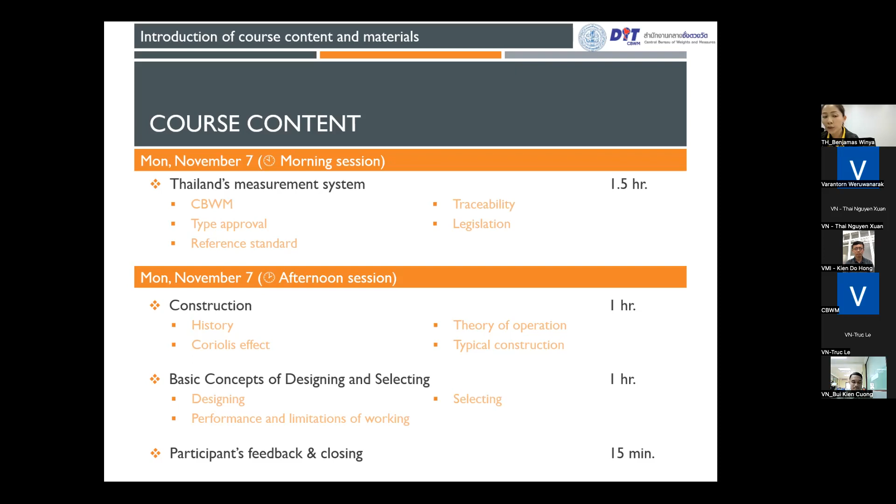Tomorrow, Tuesday November 8th, in the morning session, Marian will open the day with opening remarks for 15 minutes. Then the trainer will give you knowledge of installation, maintenance, and influence quantity. After that, Mr. Sutik, another trainer, will introduce calibration methods, covering dry calibration, wet calibration, and density calibration, before the lunch break.

In the afternoon session, he will guide you on how to verify the Coriolis Flowmeter, covering visual inspection, the verification process, sealing, verification marks, and documentation. Then we will wrap up everything learned over the 2 days together, open for questions, feedback, and comments, before closing the course completely by 3:30 p.m.

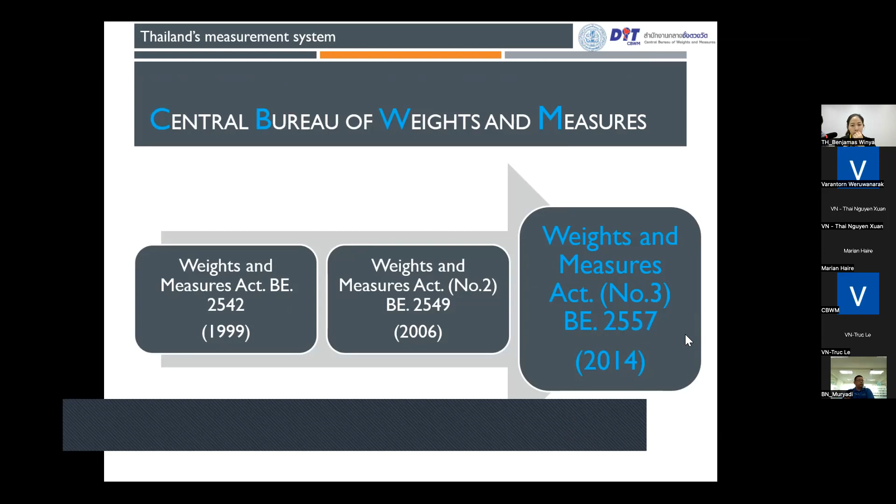CBWM is the one and only legal metrology organization in Thailand. The Legal Metrology Act of Thailand is called the Weights and Measures Act. The act was established in 1999 and revised to its current edition, the third edition, since 2014.

In this act, Central Bureau means Central Bureau of Weight and Measure, while Branch Bureau means Branch Bureau of the Central Bureau, which includes both regional centers and their branches. The Central Bureau of Weight and Measure, under the Department of Internal Trade within the Ministry of Commerce, has authority to keep and maintain reference standards of measurement, to issue business licenses and permits, to inspect and verify weighing and measuring instruments, to register the personal mark of business holders, and to perform any other acts as provided for.

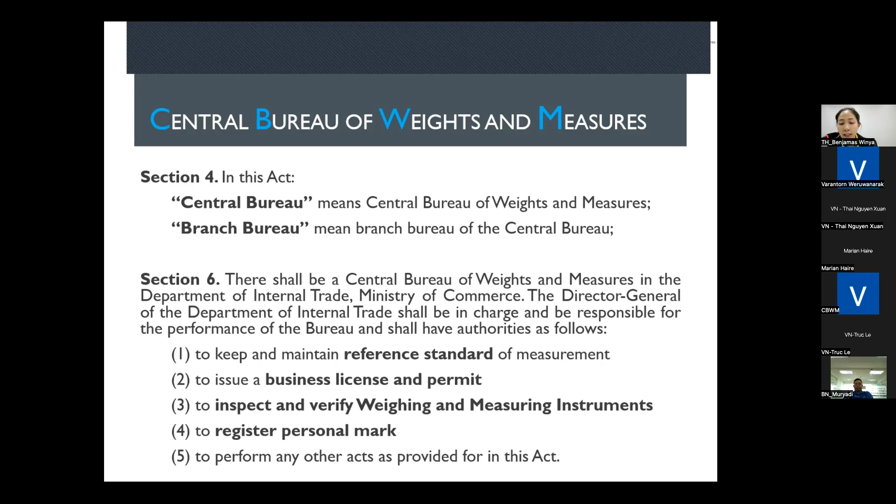As you can see from the slide, we are under the Department of Internal Trade, supervised by the Ministry of Commerce. There is also a Weight and Measure Committee to consult us. We supervise 4 regional weight and measure centers and 28 branches, covering 77 provinces for approximately 66 million people in Thailand.

In the central part of Thailand, CBWM is located in the central provinces. As you can see in the red rectangle, the Central Bureau supervises 7 branches covering 18 provinces, shown in the orange circle in the middle part of Thailand. This area is the central business area where most spring scale manufacturers are located, approximately 13 out of 15 manufacturers.

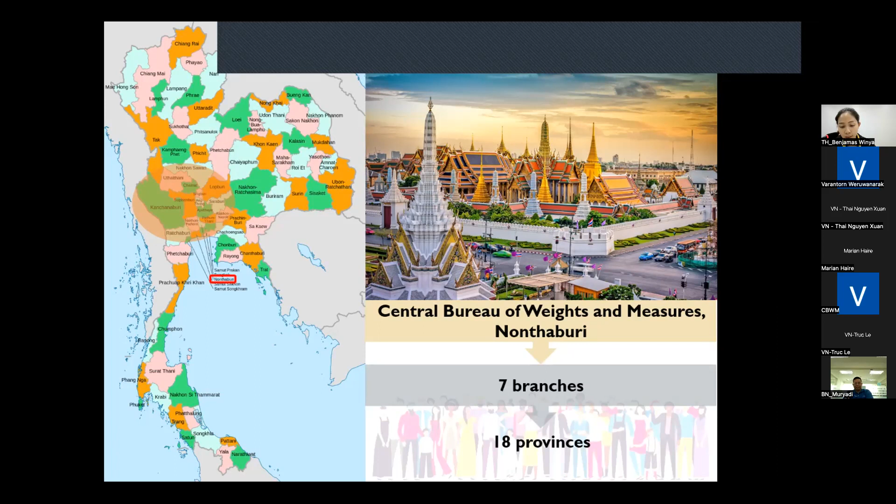The next part of Thailand is the northern part. There is the Northern Weight and Measure Center located in Chiang Mai province. The Northern Center supervises 7 branches covering 17 provinces, shown in the orange circle in the northern part. This area has many cold weather foods and vegetables for exportation.

Currently, the Northern Center and its branches are supervising the Longan grader in the northern area. The center is now setting up a laboratory for testing the refractometer and is currently studying to draft regulation for the refractometer and wood moisture meter.

The northeastern part of Thailand has the Northeastern Weight and Measure Center, located in Khon Kaen province. The center supervises 7 branches covering 20 provinces, as you can see in the orange circle.

This area has the most various types of rice and rubber trees in Thailand. Currently, the Northeastern Center is studying rice quality measuring instruments, apart from the rice moisture meter that is already regulated. They also have a percent starch measuring instrument for tapioca used in this area, and this type of instrument has registration as well.

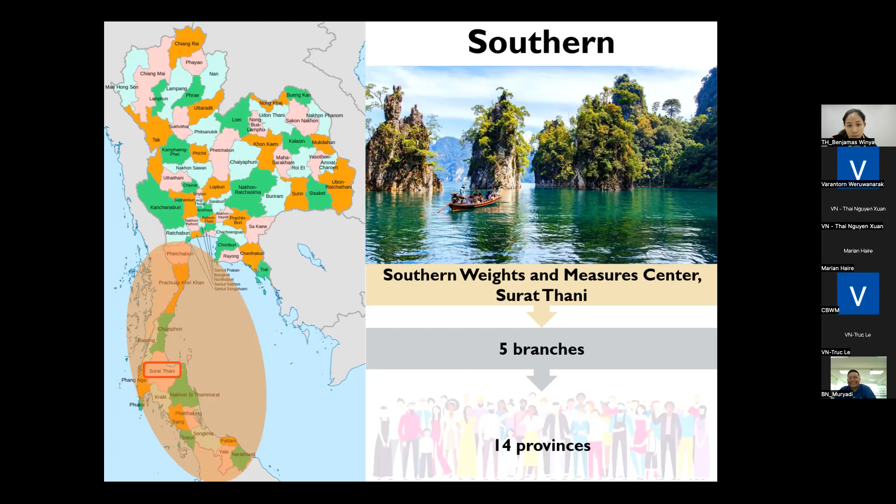But there are many oil refinery plants, oil depots, and important port areas located here, such that large flowmeters and weigh-in-motion scales are mostly found in this region. Coriolis mass flowmeters, fuel dispensers, LPG dispensers, and NGV dispensers are mostly found here, apart from the Bangkok metropolitan area.

The next session covers the Thai framework.

According to the Act, the scope of weighing and measuring instruments under this Act, or regulated instruments, includes all kinds of weighing instruments and all kinds of volume measuring instruments, except those notified to be exempt. Meanwhile, a measuring instrument which the Minister of Commerce notifies to be included is a regulated instrument under this Act.

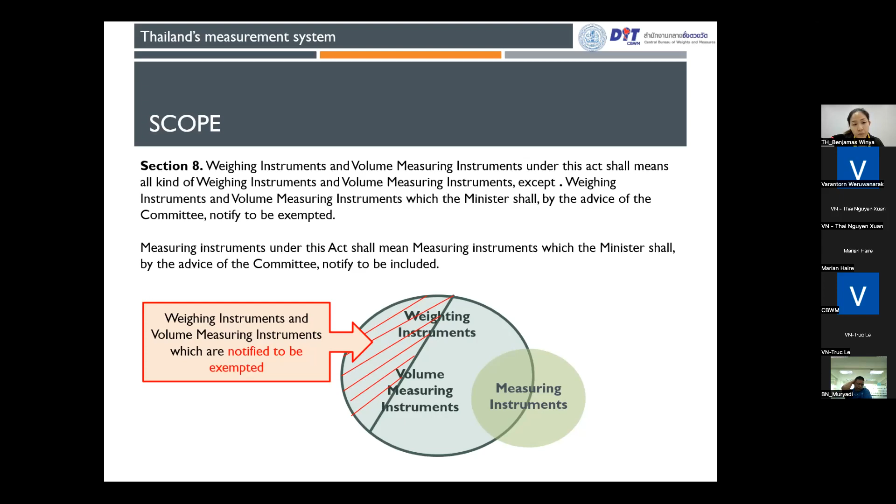So, not all regulated instruments are required to be verified. This section of the act specifies that only regulated instruments used in a sale or exchange of merchandise with another person, or in measurement services, or for the purpose of calculating remunerations, tax, and fees are required to be verified by Cbwm officers.

For the type approval system in Thailand, the act indicates that a manufacturer or importer who would like to manufacture or import weighing and measuring instruments used in a sale or exchange of merchandise with other persons, or in measurement service, or for the purpose of calculating remunerations, tax, and fees — which is the regulated instrument — shall submit the type of instrument along with supporting documents, or submit a type approval certificate to the Cbwm officer to be approved. As you can see from the picture, type approval is illustrated the same as verification, which means that the group of regulated instruments required to be verified shall be required to have type approval too.

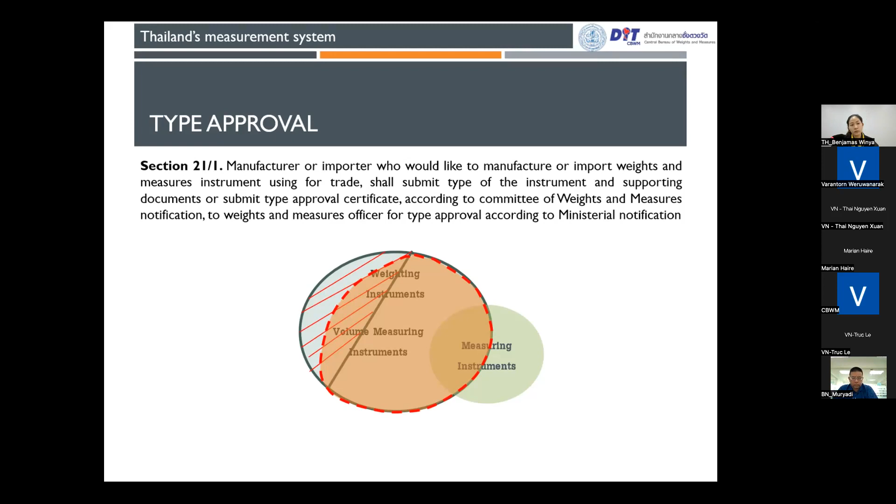The traceability chain — this slide shows the traceability chain of Thailand's measurement system. The regulated weighing and measuring instruments found in the market and used in a sale or exchange of merchandise with other persons, or in measurement service, or for the purpose of calculating remunerations, tax, and fees, are verified and inspected by the reference standard of Cbwm.

Here, this is the working standard that we use, traceable to the reference standard. For this reference standard, we keep three types of reference standards: the primary, the secondary, and the tertiary. This here is the reference standard from us.

And then we use the primary standard, which is traceable to the national primary standard kept by NIMT. Here and here from NIMT, this is traceable to the definition of the unit defined by BIPM at the top of the pyramid.

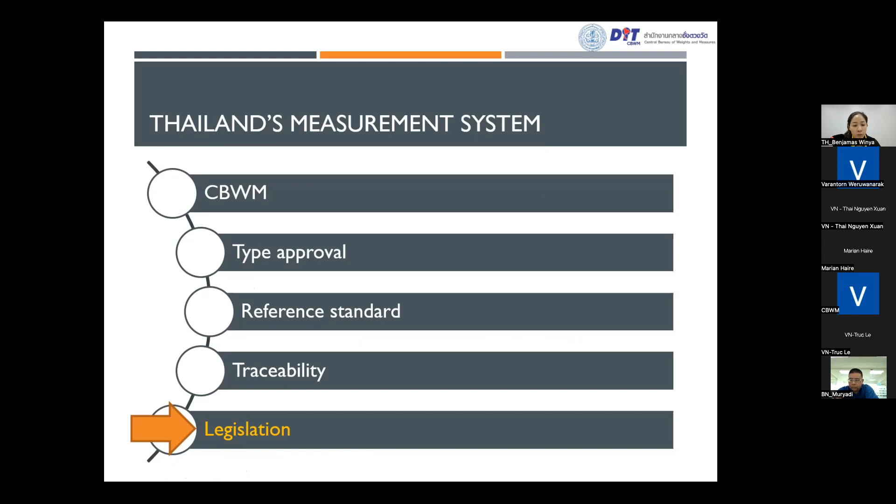Okay, so the next session is where I will brief you on the regulation of the Coriolis flowmeter. The regulation of the Coriolis flowmeter is specified in the notification of the Ministry of Commerce. This is the long name of the notification: notification of the Ministry of Commerce regarding prescription of type and characteristic of direct mass flow meters.

It also details the material used for manufacture, maximum permissible error, and the term of verification. So this notification contains not only the term of the direct mass flow meter, but also the requirement for the detail of material used to manufacture the flow meter. This notification will tell you the maximum permissible error of the flow meter and also the term of verification.

So in this notification, the direct mass flow meter is the meter designed to directly indicate the value of the mass of liquid or gas in a vapor state flowing through the meter, without depending on any associated devices or data indicating properties of the liquid or gas at the time of measurement from a source outside the system. Actually, there is one type of direct mass flow meter currently used in Thailand, namely the Coriolis mass flow meter.

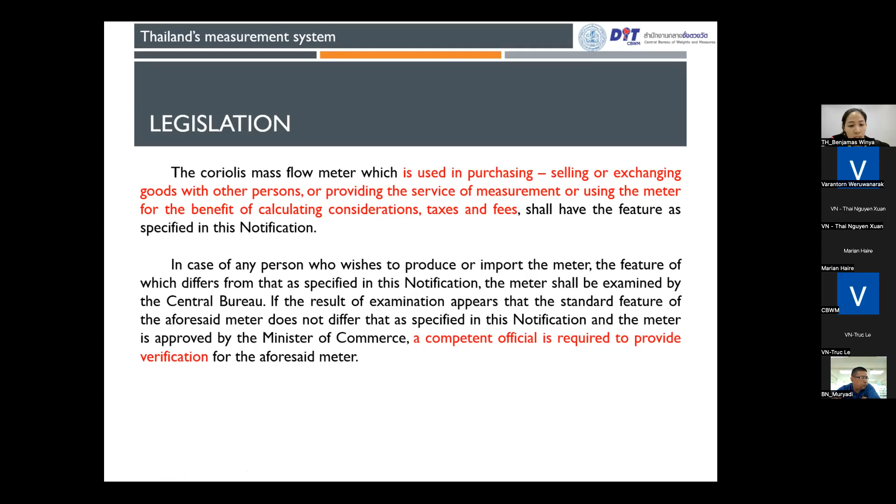The Coriolis mass flow meter shall be produced in a durable manner. In addition, it shall not be simply used as a tool of fraud.

The mass flow meter shall be produced from good material. It shall be designed and produced so that when used as usual, it can always operate accurately, and the components can operate continuously without defect, bend, or deformation which affect the accuracy of the meter. In case of adjusting the meter, the adjusted meter is required to maintain accuracy appropriately. In case of necessity, the Central Bureau of Weights and Measures may test the type of the meter in accordance with rules, procedures, and conditions stipulated by the minister on the recommendation of the committee.

But as I mentioned before, we have not passed the type approval system in Thailand yet. So maybe some types that we suspect to be used for fraud will be tested by us.

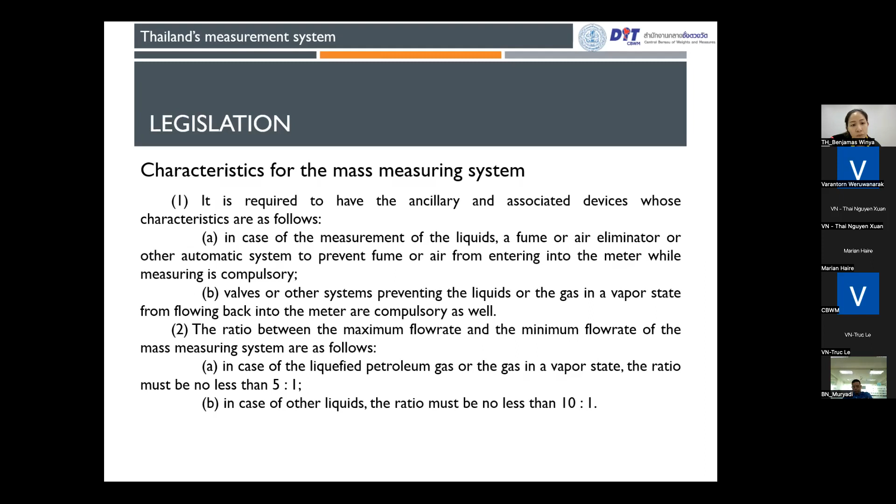The direct mass flow meter adjustment is required for adjusting the ratio between the displayed volume and the volume of the liquid or gas in a vapor state as actually measured by the measurement system of the meter. A shortcut piping system is prohibited to be used in adjustment, and there shall be a tamper evidence seal to prevent later adjustment.

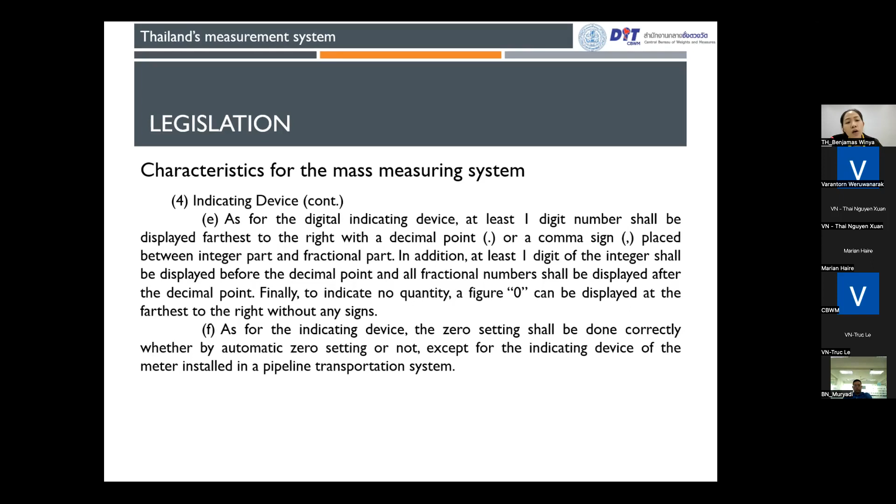The notification also requires detail for the indicating device, the zero setting device, and the price calculating device, as well as the quantity pre-setting device and price pre-setting device.

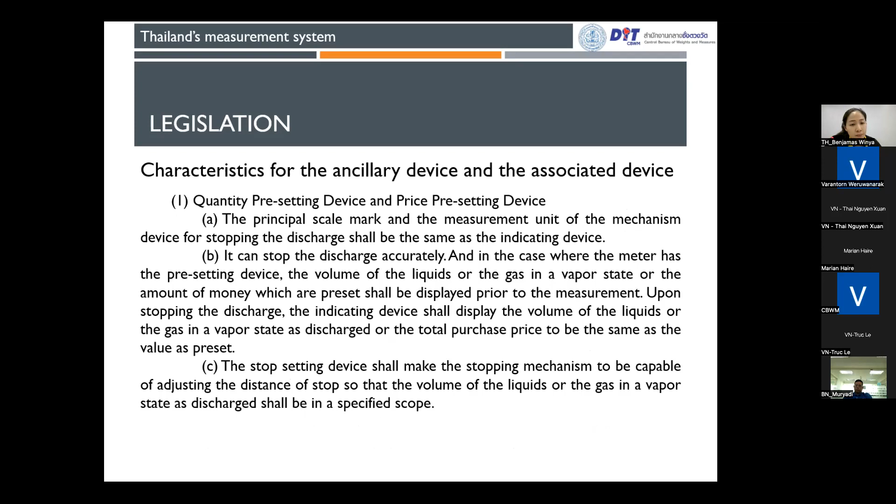Here we also have the characteristics of the printing device or the cash register. For example, the scale marks shall correspond with the indicating device. The printing of the measurement result shall correspond with the result shown on the indicating device, and the result shall be printed only after the measuring process is complete.

The printing of measurement results shall include details such as the total volume discharged, the unit price of the product, the total purchase price, the product type indicated by name, symbol, acronym, or code, and the date, month, and year of the sale.

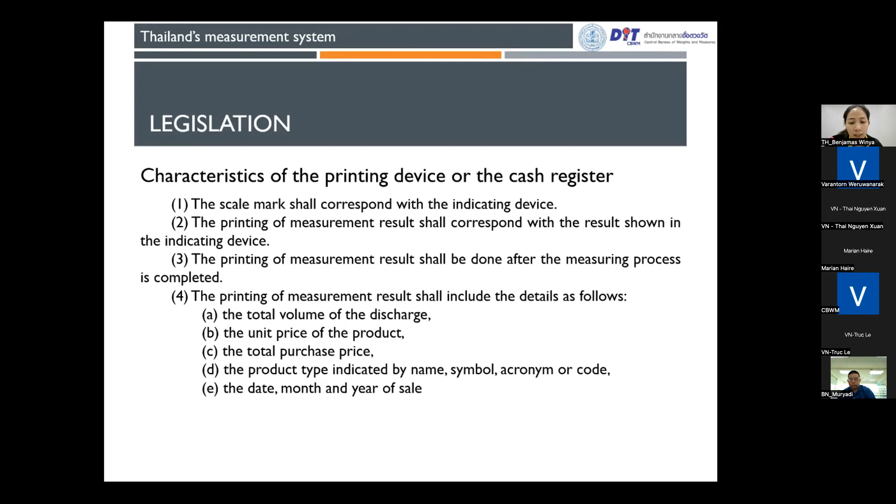For the MMQ, the minimum measured quantity shall be determined by the producer. As I mentioned before, this notification also indicates the maximum permissible error, or MPE.

For the MPE for initial and subsequent verification, we have 3 cases. The first case: if the test volume exceeds twice the MMQ, at the specified temperature, pressure, and flow rate, it shall provide both the positive and negative sides of the MPE of the weight as displayed at the measuring condition, or the volume of the liquid or gas in a vapor state as displayed at the base condition, conforming to the following table.

In the table, they classify the mass measuring instrument system into 2 types. The first type is the meter installed in a mass measuring system, which we call A. For A, if used for liquid excluding LPG, the MPE should be 0.5%; for LPG it should be 1%; and for gas in a vapor state, it should be 1.5%.

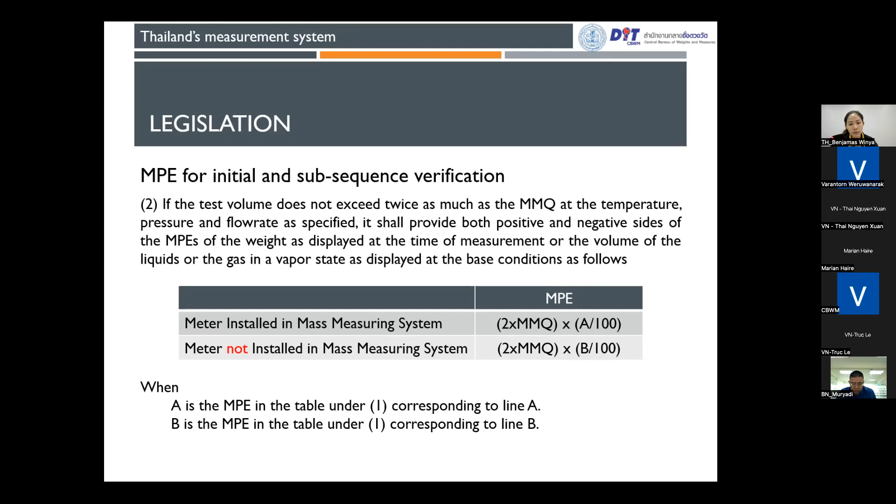The third one is errors in repetition - the error in repetition of the mass measurement results of the liquid or gas in a vapor state. If the test volume is no less than 5 times the MMQ at the specified temperature, pressure, and flow rate, the difference between the highest and lowest value of the test volume, consistent as displayed at the measuring condition, or the volume of liquids or gas in vapor state as displayed at base condition, shall have the value of weight conforming to the following table.

For A, the meter installed in the measurement system: for liquid excluding LPG, the error in repeatability should be 0.3%, while for LPG it is 0.6%, and for gas in vapor state it is 1%. For the other category, meters not installed in the measuring system: for liquid excluding LPG, the error should be 0.2%, for LPG it should be 0.4%, and for gas in vapor state it should be 0.6%.

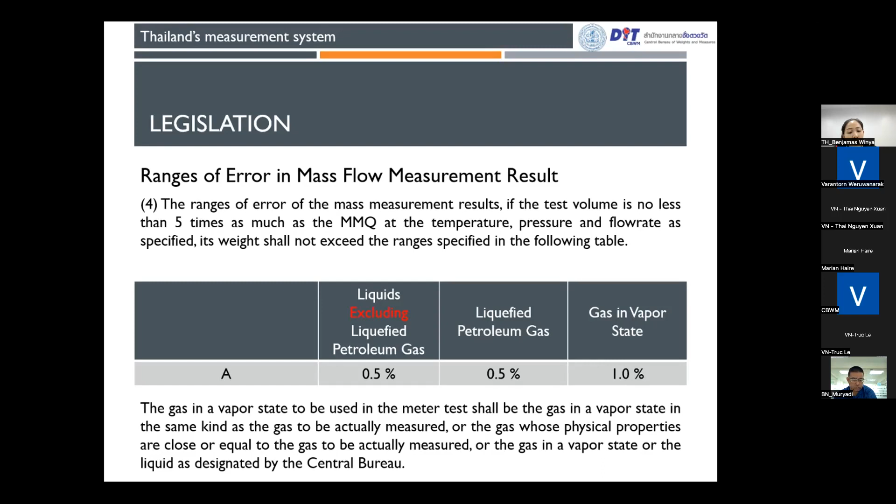The gas in vapor state to be used in the meter test shall be the gas in vapor state of the same kind as the gas to be actually measured, or a gas whose physical properties are close or equal to the gas to be actually measured, or the gas in vapor state or liquid as decided by the Central Bureau of Weights and Measures.

This table is the MPE for the inspection process. The MPE for the inspection of the meter which is installed in the measuring system when in service shall correspond to the designated range in the following table.

For the inspection, the MPE for the meter used for liquid excluding LPG should not exceed 1%, while for LPG should not exceed 2%, and for gas in vapor state should also not exceed 2%.

The notification also indicates additional characteristics for the mass measuring system in petrol stations providing LPG and gas in vapor state. You can see more detail in the notification.

The last one is the detail required to display on the flow meter, which has to be clear and indelible. First, year of production. Second, the minimum flow rate and maximum flow rate. Third, the maximum pressure at which the meter can operate. Fourth, the range of temperature at which the meter can operate. Fifth, the range of viscosity or the type of product used. Sixth, the minimum measured quantity. Seventh, the rated operating conditions. And the last one, in the case where there are other limitations, the display of such limitations shall be made.

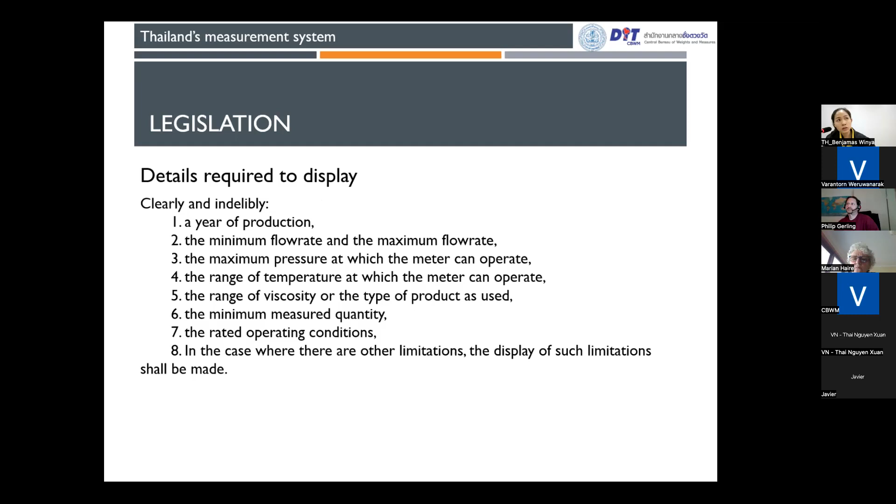Any questions? Hi, I have a question from Vietnam. Thank you for the nice presentation. I have one question about MMQ. How do you determine the MMQ value for valid verification? So, minimum measured quantity.

I think this is also a question I might answer, Benji, if you don't mind. Yes, go on, may I jump in? Sure. Well, the minimum measured quantity is a characteristic value of each and every single measuring system. It is a value from which quantity upwards a measuring system is expected to be correct within the MPEs, the maximum permissible errors.

Suppose a very big system - it is impossible to measure accurately with very big meters if you want to measure small quantities. So the smaller a meter is, the smaller the MMQ can be set, and if the meter becomes bigger, MMQ will become bigger. But it is a characteristic of each and every single measuring system. So generally speaking, it is not allowed to measure quantities below MMQ, because below MMQ the percentage error might become too high.

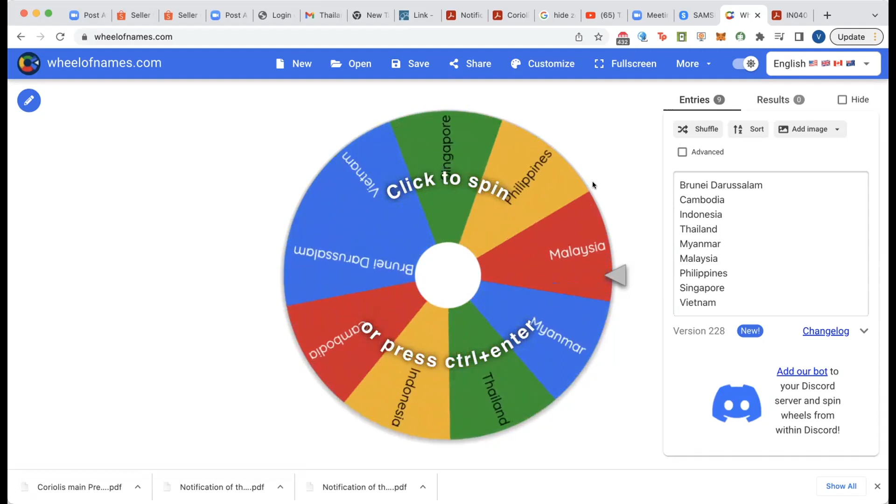If I click spin and the wheel stops at any of your economies, please share your experience regarding the flowmeter, any kind of flowmeter. You can say something about the Coriolis or other type of flowmeter. It depends on you. So I will spin the wheel, and if your economy was chosen, please send your representative from your economy to play the game with us. Thank you.

The first economy that was selected by the wheel is Brunei Darussalam. Please send your representative to share your experience about flowmeter with us. Thank you.

Mr. Nison. Mr. Nison, would you like to share some of your experience about the Coriolis flowmeter?

Hello, everybody. For Coriolis flowmeter, at the moment, we haven't done any. We have customers who have 3 Coriolis flowmeters in Brunei, but at the moment we haven't started doing anything. Usually in Brunei, we select a third-party vendor which is qualified to do it. The majority of our vendors come from Singapore and Malaysia, so they're doing it for us. We just accept their report and we transfer knowledge from the economy from Malaysia or Singapore, depending on the vendor. All right, thank you.

Today the main topics are as follows: one, history; two, Coriolis effect; three, theory of operation; and typical construction.

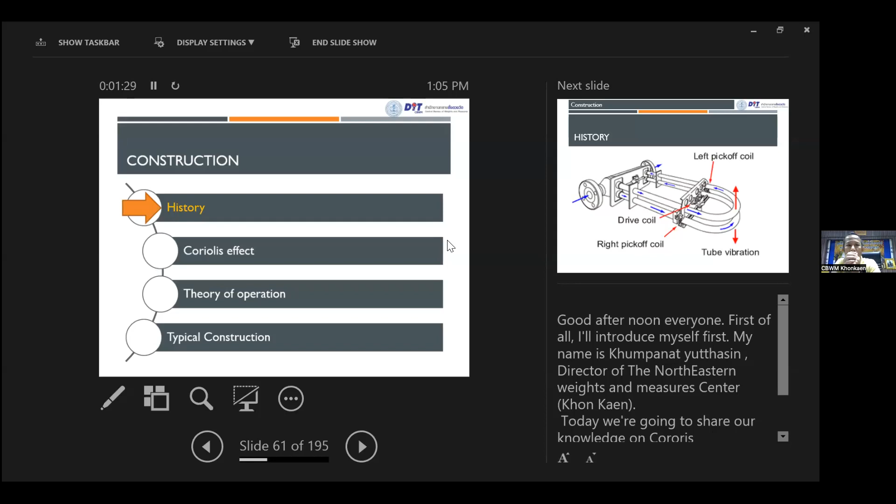Construction of a mass flowmeter consists of history, Coriolis effect, theory of operation, and typical construction.

Coriolis mass flowmeter is a flowmeter that measures mass instead of volume of liquid. This type of mass flowmeter has been developed to be used in a wide variety of industrial applications for more than 25 years.

The main characteristic of this flowmeter which made it widely used is that it does not depend on factors or properties of the liquid being measured. Meanwhile, other flowmeters are affected by density, velocity, viscosity, pressure, and/or temperature of the liquid being measured.

Mass flowmeter measures the mass of a liquid while the liquid is flowing through the meter sensor. With this unique characteristic, we can use this type of flowmeter to measure various types of liquid without calibration, adjusting compensation values, or adjusting corrective values due to changing factors or properties of the liquid being measured.

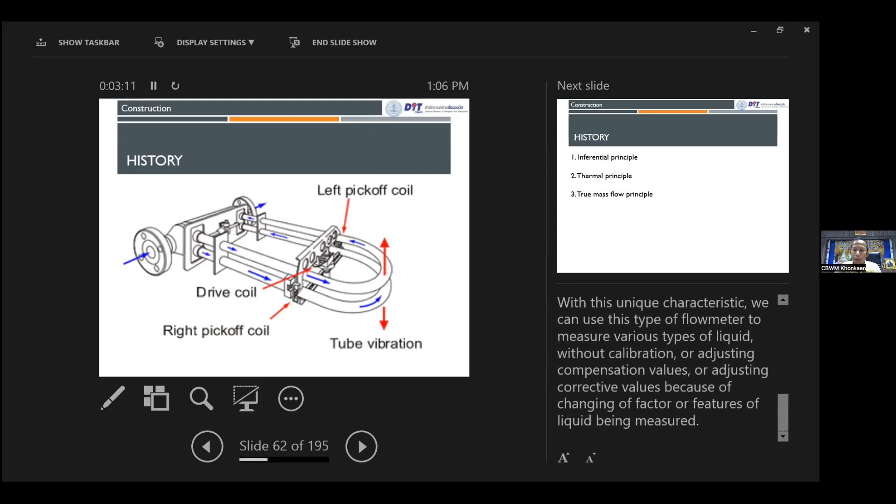Before getting to know more about mass flowmeters, we should understand the general fundamentals of the mass flowmeter.

There are three operational principles to measure mass flow rate as shown on the slide: one, inferential principle; two, thermal principle; and three, true mass flow principle.

First, mass flowmeter using the inferential principle. This type of flowmeter is used to measure flow rate by volume together with measuring density of liquid.

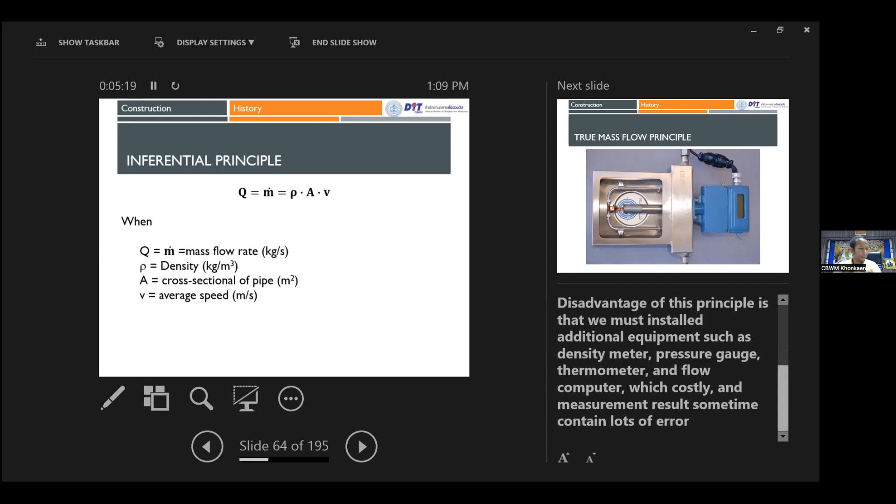Okay, in the thermal principle, we... sorry, we have a technical problem. Just wait a second.

Hello. Hello, everyone, can you hear me? Yes, we can hear you, but the host has some technical problems, just wait a second. Everyone can see the slide? We can't see the slides right now, so just wait, try to share the slide again. Okay.

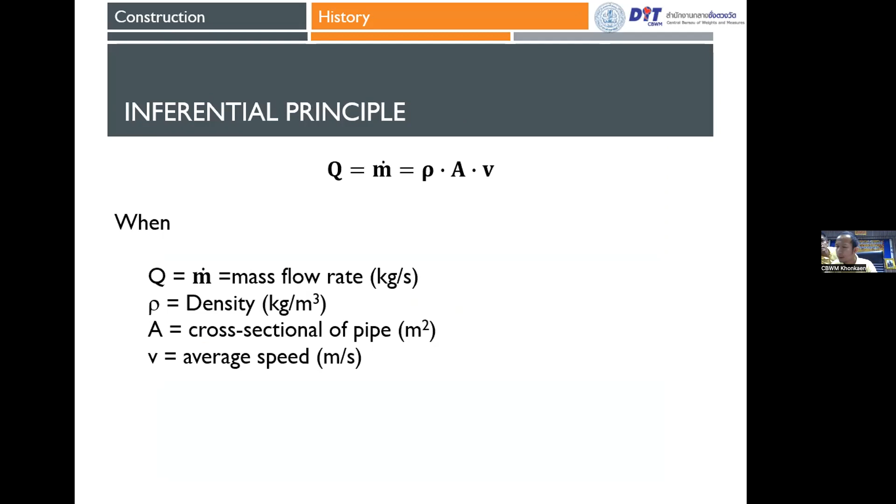Okay, true mass flow principle. Everyone can see the true mass flow meter principle? We can, yes, hear you, and we can see the slides, and we can hear you, so off you go, we're ready. True mass flow principle.

The flowmeter using true mass flow principle uses the principle of analyzing the result of rotation, movement, and radial motion of liquid. This movement of liquid creates Coriolis acceleration and Coriolis deceleration from the force of the liquid on the meter.

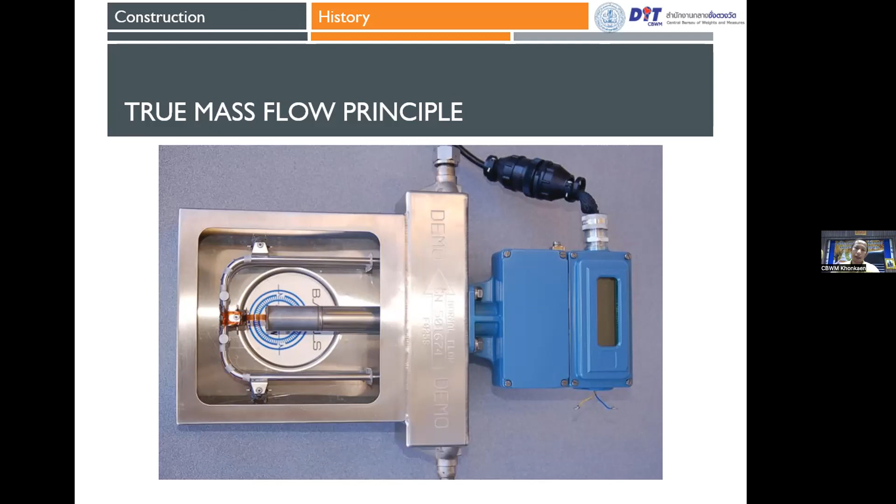Okay, next topic: Coriolis effect.

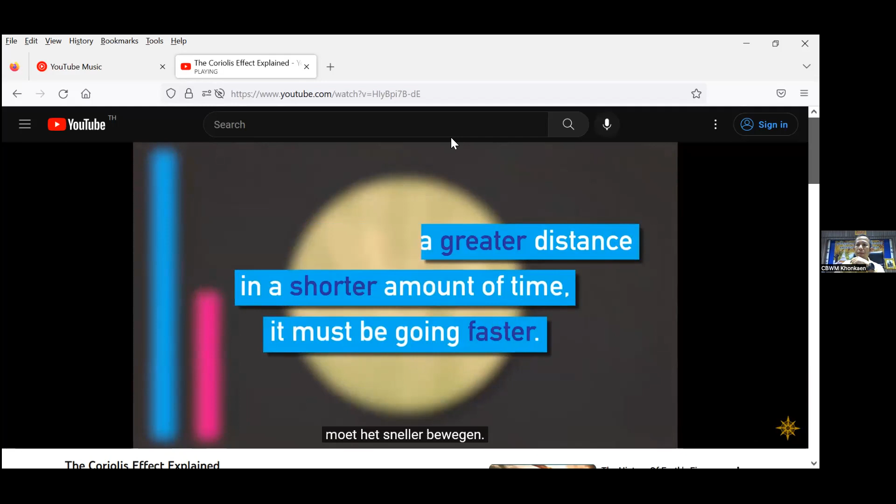Now swap out this flat circle for the Earth, and this remains true. All points closer to the center, like Greenland, will be spinning slower compared to points further away, like Brazil, closest to the equator. If we look at this over time, arrows at the equator travel faster than arrows at the 45-degree line, as we just observed.

Now imagine clouds form on the equator. They'll have the same velocity as the Earth there, but when the wind sweeps them north, the Earth isn't spinning as fast. Their speed remains the same, they don't get any faster, but everything around them is literally traveling slower. So relative to the ground, they move ahead of everything else.

If you're on the 45-degree line, you'll have the same speed as everything around you. But if you move down toward the equator, you'll be moving slower than the ground underneath you, so you'll fall behind. The same happens in the other hemisphere: moving toward the equator always results in falling behind, while moving away results in pushing ahead.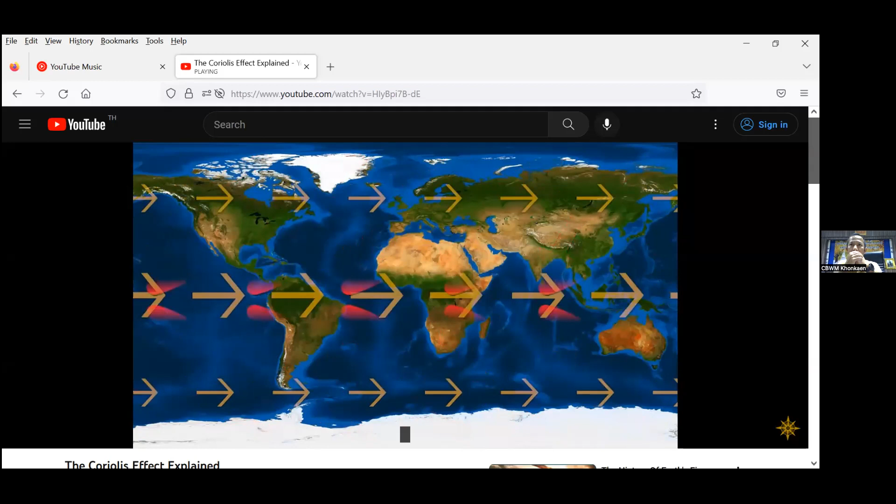Now let's show a low pressure cell. That means all the air around it will be sucked into the center. Air coming from the equator will be traveling faster, so it deflects to the right, while air coming from the poles will be moving slower, so it falls behind and deflects to the left. This results in a circular air current spinning counterclockwise, and that's exactly what hurricanes are — low pressure cells spinning because of the Coriolis effect.

Moving this example to the southern hemisphere, things are reversed. A low pressure cell will still suck in the same amount of air. Now the air coming from above moves faster, again deflecting to the right, while the air coming from below moves slower, again falling behind and deflecting to the left. This results in a clockwise spin, which is why storms in the southern hemisphere spin this way.

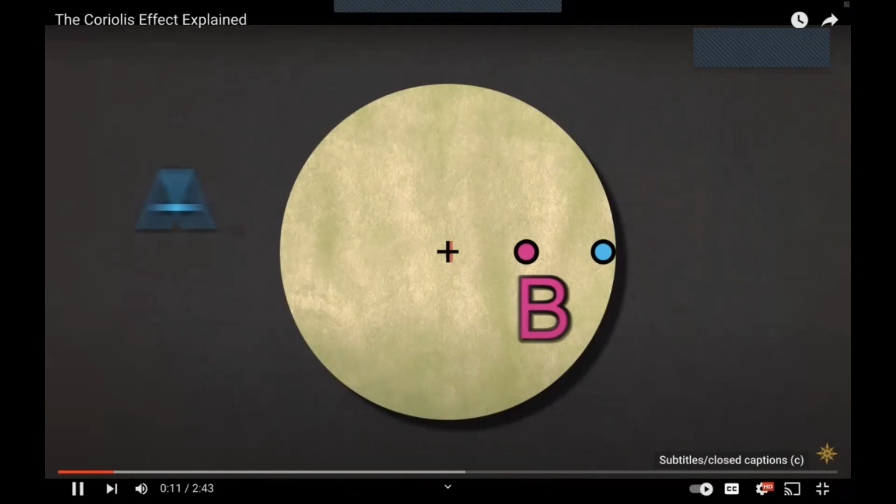Picture a circle. Here's its center, here's point A, and here's point B. Point A is twice the distance from the center than point B, and it spins from its center. In 2 seconds, both points do 1 full revolution. But to go all the way around, point A has to travel farther than point B in the same time, and something traveling a greater distance in the same time must be going faster. So point A must be moving faster than point B.

Now swap out this flat circle for the Earth, and the same thing is true. All points closer to the center, like someone in Greenland, will be spinning slower compared to points further away, like people in Brazil, closer to the equator. If we look at it flattened out, arrows at the equator travel faster than arrows at the 45-degree line, like we just observed.

Now imagine you're a cloud that formed on the equator. You'll have the same velocity as the Earth, but then a gust of wind sweeps you north, where the Earth isn't spinning as fast. Due to inertia, your speed remains the same. You don't get any faster, but everything around you is traveling slower, so relative to the ground, you move ahead of everything else. If you're a cloud that forms at the 45-degree line, you'll also have the same speed as everything around you, but if you drift down to the equator, you'll be moving slower than the ground underneath you, so you'll fall behind.

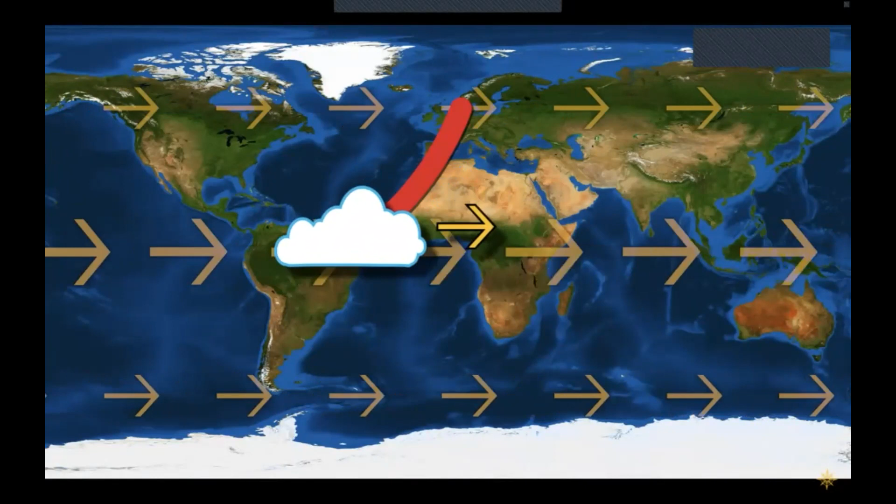The same is true for the southern hemisphere. Moving towards the equator always results in falling behind, while moving away results in pushing ahead. Now imagine a low-pressure cell. That means all the air around it gets sucked into the center. But the air coming from the equator will be traveling faster, so it deflects to the right, while the air coming from the poles will be moving slower, so it falls behind and deflects to the left. This results in a circular air current spinning counterclockwise, and that's exactly what hurricanes are: low-pressure cells spinning because of the Coriolis effect.

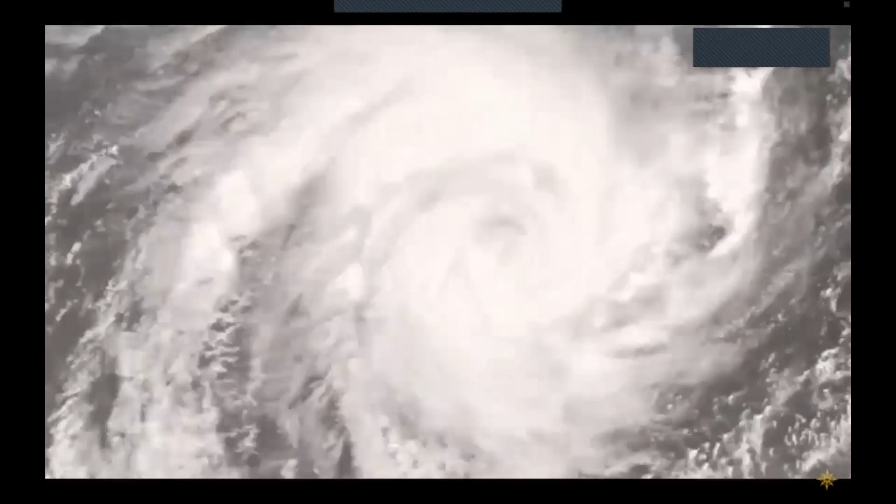Moving this example to the southern hemisphere, things are reversed. A low-pressure cell will still suck in the surrounding air, but now the air coming from above will be moving faster, again deflecting to the right, while the air coming from below is moving slower, again falling behind by moving to the left. This results in a clockwise spin, which is why storms in the southern hemisphere spin this way.

And that's about it. It's a short video, and that's kind of the point. I hope you got what you came for. The Coriolis effect doesn't really influence toilets, they're just too small, and the direction of the spin depends more on the placement of jets inside the toilet. But that's it, that's the Coriolis effect.

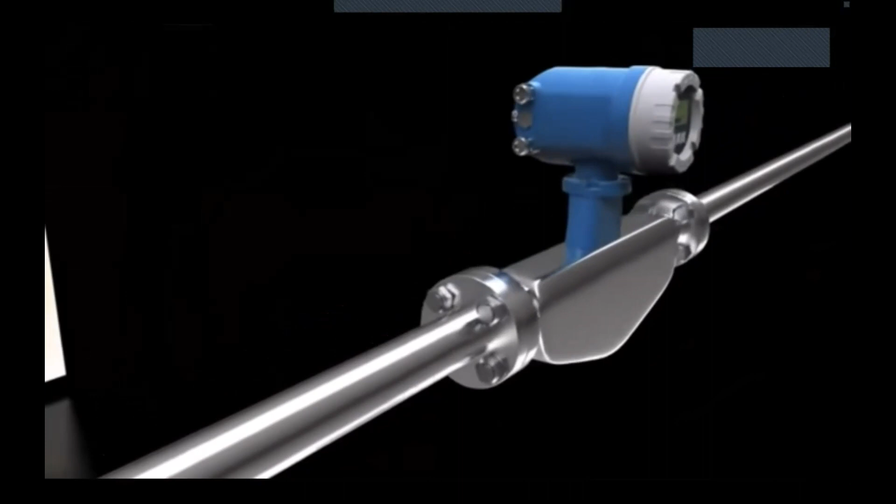The most diverse substances are transported and distributed in pipelines every single day. This may include drinking water, fruit juices, oil and gas, as well as chemicals, acids, or alkalis. The fluids flowing through pipelines often display completely different properties, so there are different principles for their measurement. One such method is flow measurement based on the Coriolis principle. The French physicist Gaspard Gustave de Coriolis set out the physical basis for this measuring principle over 150 years ago. What is interesting is that the Coriolis principle allows the flow of mass to be directly measured. Let's take a closer look at how this measurement method works.

A tube is located inside each Coriolis flow meter. An exciter causes this tube to oscillate constantly, shown here in an exaggerated example. If there is no flow, the measuring tube oscillates uniformly. Sensors are located at the inlet and outlet and register this basic oscillation precisely.

As soon as the fluid starts to flow in the measuring tube, additional twisting is imposed on the oscillation as a result of the liquid's inertia. Due to the Coriolis effect, the inlet and outlet sections of the tube oscillate in different directions at the same time. The highly sensitive sensors pick up this change in the tube oscillation in terms of time and space. This is known as the phase shift, and is a direct measure of how much liquid or gas is currently flowing through the pipe. The higher the flow velocity, and thus the total flow, the greater the deflection of the oscillating measuring tube.

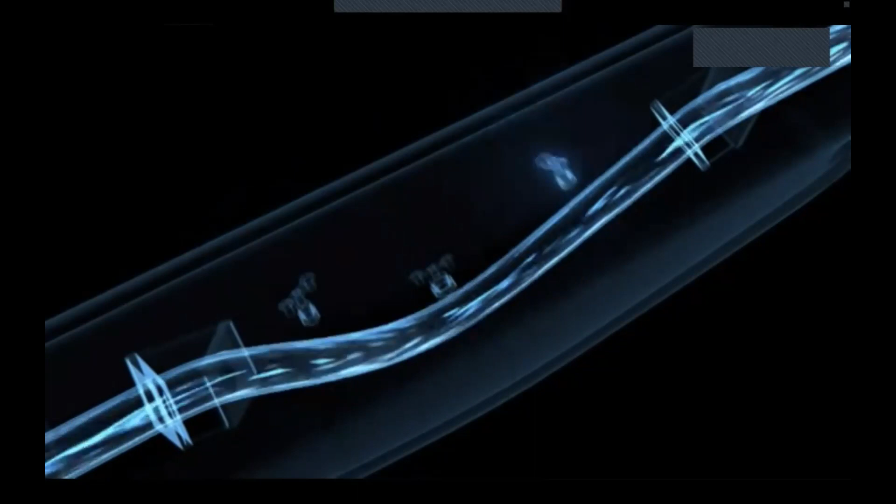The application of the Coriolis measuring principle doesn't stop here. It can also be used to simultaneously determine the density of the flowing fluid. To do so, the sensors also register the oscillating frequency, in other words, how often the measuring tube moves back and forth in one second.

From the animation, it's clear that a tube filled with water oscillates more frequently than a tube filled with honey, for example, which has a far higher density. Thus, the oscillating frequency is a direct measure of the fluid's density. Both the density and the flow are determined simultaneously but independently via the tube oscillation.

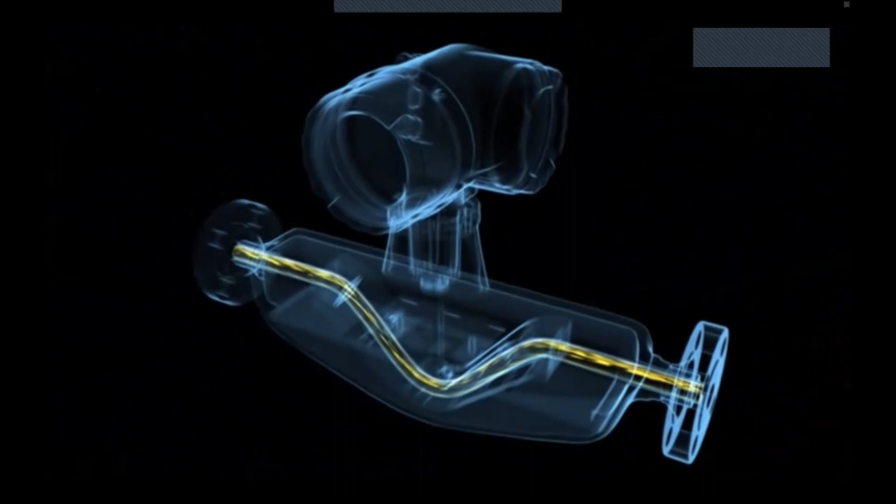Endress and Hauser has continuously revolutionized and perfected Coriolis flow measuring technology in numerous innovative systems. This measuring technology is unique, as it's the only way multiple process variables such as mass flow, volume flow, density, temperature, and even viscosity can be measured simultaneously in pipelines.

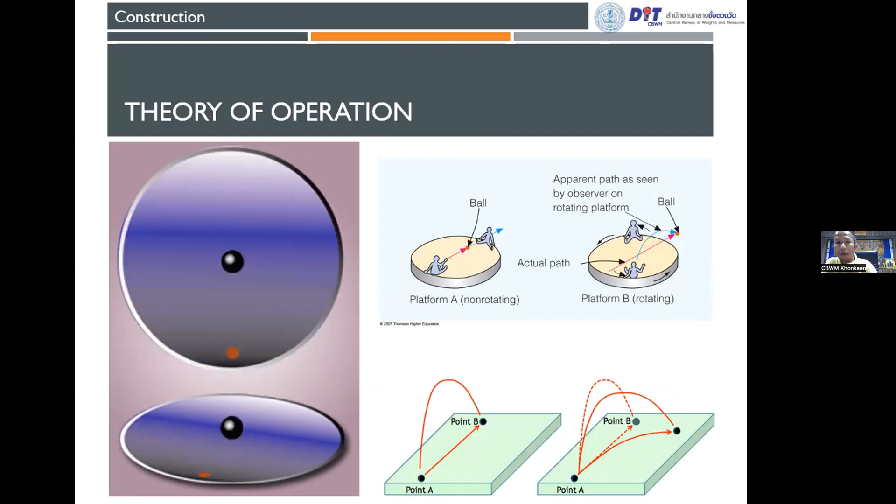This theory of the mass flow meter. Okay, this picture is a Coriolis force, centrifugal force, and other force.

The theory of operation of a mass flow meter is information on design and construction of the mass flow meter.

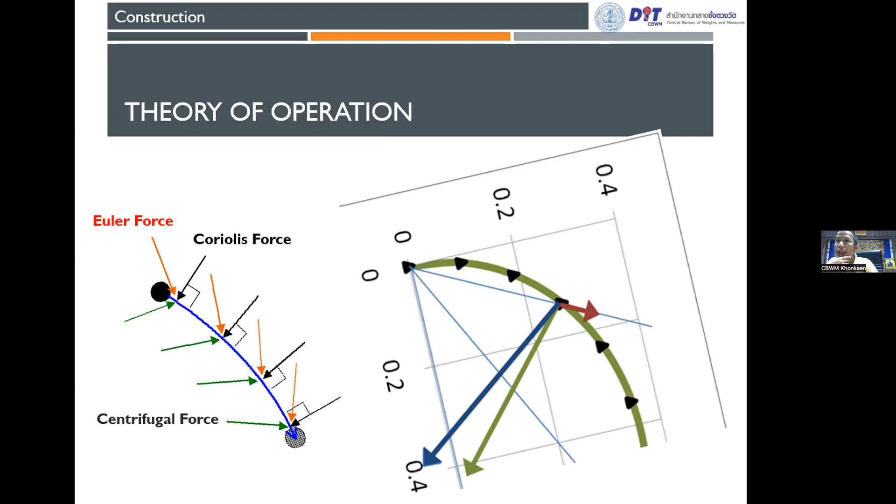Coriolis force. Coriolis force F is equal to mass multiplied by 2, angular velocity, multiplied by average fluid velocity.

Actually, in the theory, I think it's necessary for design mass flow meter, but I think participants want to know calibration, want to know verification, and want to know... okay, sorry.

Typical construction. Okay, construction of a mass flow meter. Sensor unit or tube sensor, vibrating measuring section. Begin with the first part.

Sensor unit or tube sensor or vibration measuring sensor. This part or section of the Coriolis flow meter is very important for operation of the Coriolis flow meter, and could guarantee high accuracy and appropriate work.

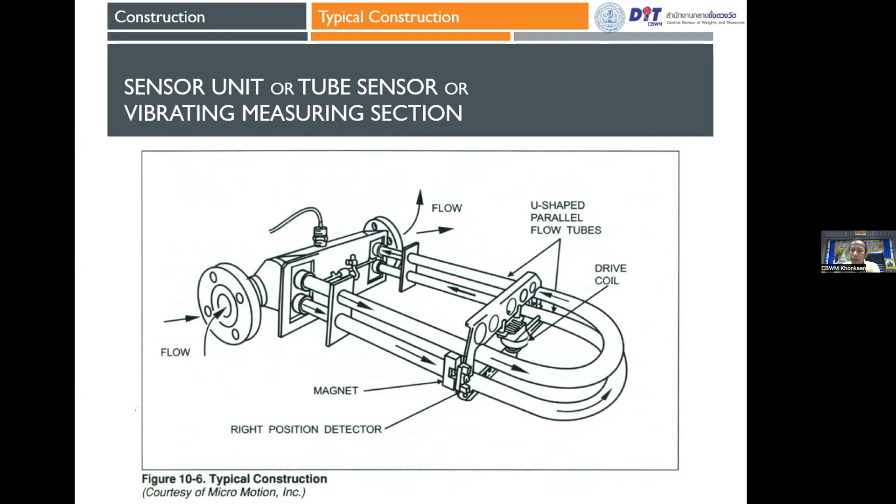This part consists of... okay. Measuring tube or flow tube, which is a tube in U, omega, or any shape, illustrated in the slide, depending upon time of operation, shape of the tube, and pressure drop.

Since the specific frequency vibrates the measuring tube, and one end of the tube is tightened, the stiffness of the tube is an important thing to consider. When the period of vibration or length of movement of the measuring tube is high, the stiffness of the tube should be high too.

In some cases, stiffness of the tube could be reduced by increasing the length of the tube, which gives the tube various shapes as illustrated in this slide, and decreasing the overall laying length, but the pressure drop or pressure loss is high since the liquid flows through the tube.

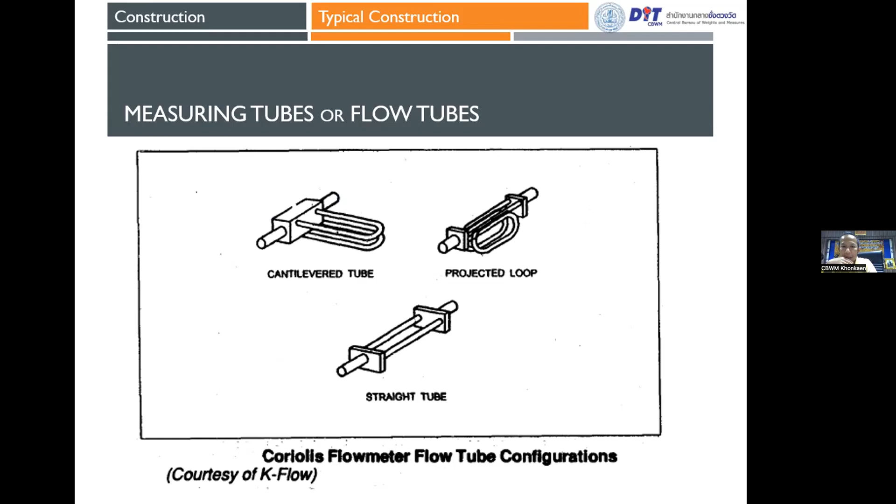Okay, measuring tube or flow tube is a part that directly contacts liquid. The tube is made with a material that is corrosion resistant. Mostly the tube is made with seamless stainless steel 316 or 316L.

316L tube that is coated with a non-metallic substance such as Tefzel inside. Moreover, the tube might be made with titanium alloy and titanium instead of stainless steel pipe, when stainless steel pipe could not resist the corrosion.

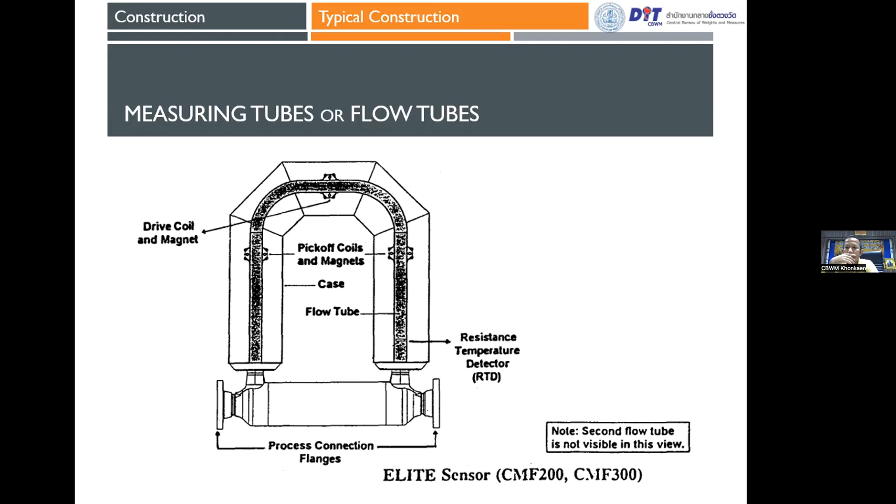Okay, this picture of measuring tube. Okay.

The flow splitter, in case that the Coriolis mass flow meter consists of two tubes. This two-tube flow meter has an advantage in decreasing impact from outside vibration force that could disturb the operation of this flow meter.

All tube sensors will be connected to the flow splitter. This splitter will connect to the flow rate measuring system and split the liquid that flows into the flow meter into two equally... sorry.

Okay, all tube sensors will be connected to the flow splitter. This splitter will connect to the flow rate measuring system and split the liquid that flows into the flow meter into two equal sections in order to let them flow into these two tubes. Then it combines these two sections of liquid that flow out of the tube and returns them to the flow tube system as follows, mostly in the design process.

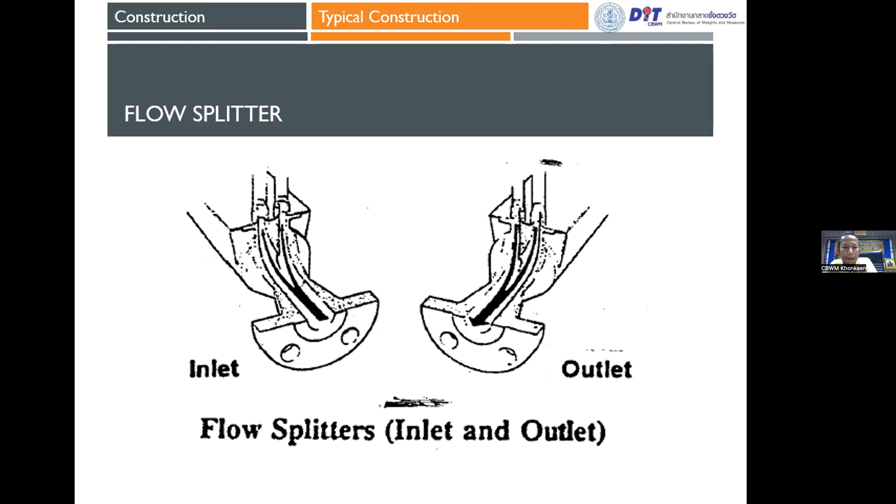Drive coil is sent a signal for the right position detector and left position detector.

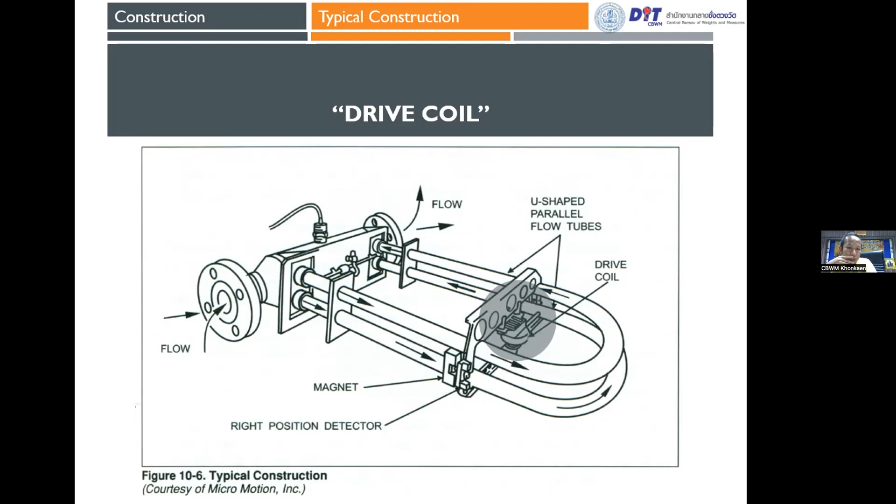The drive coil is installed at the center between two measuring tubes, by installing one vibration source into one tube and an opposing magnet on the other tube, in order to make both tubes vibrate at natural frequency with about 180 degrees of different vibrating phase. This decreases vibration of the mass flow meter system, making a balance inside the sensor unit.

The motion sensor, or pickoff coil and magnet, will be installed at both tube legs at inlet and outlet, in order to sense the motion of these two legs of the tube on both sides.

Most motion sensors are electromagnetic, but some manufacturers develop optical sensors instead of electromagnetic ones. This motion sensor senses the motion of the tubes and transmits a signal to be electrically compared to determine Coriolis twist.

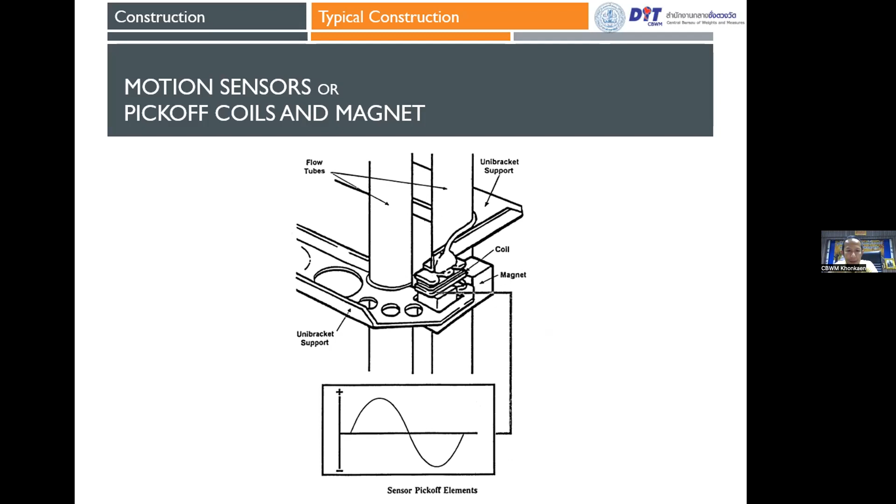Okay, temperature sensor. The flow meter has a temperature sensor installed at the outside surface of one of the tubes in the system, mostly installed at the tube near the inlet, using temperature sensors such as a resistance temperature detector, or RTD.

Resistance temperature detector, RTD. This works by inputting a fixed voltage at a specific value to the RTD and continuously measuring electric resistance, using the principle that the electrical resistance of the medium will change along with temperature, so that the voltage changing because of electric resistance could indicate the temperature of that tube.

Since the stiffness of the tube can be measured as a modulus of elasticity impacting the tube's twisting, when liquid flows through the tube it is stimulated to vibrate at a steady natural frequency, also called the Coriolis effect. Including the rigidity of the tube, measured from the modulus of rigidity, this value impacts the natural frequency of the vibrating tube.

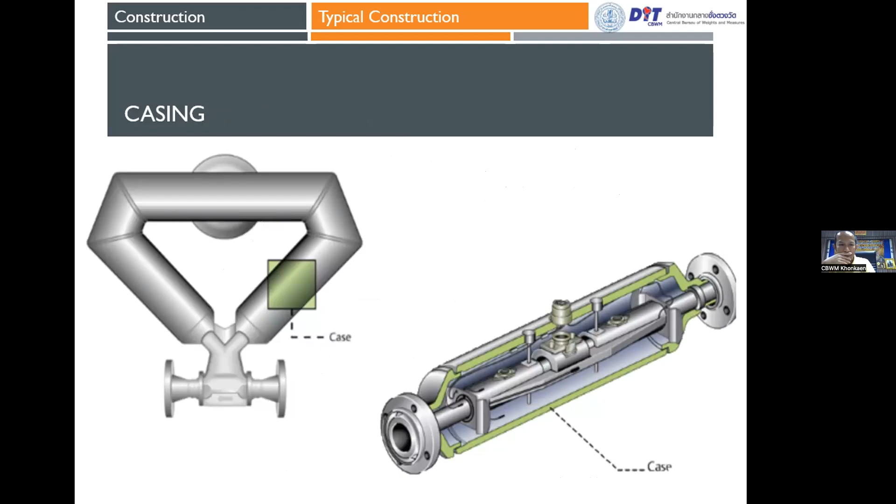Okay, casing of the mass flow meter. The casing has a main role in protecting the measuring tube, flow splitter, drive coil, motion sensor, and temperature sensor from the outside environment, which may affect operation of the flow meter or cause corrosion of these components. Typically, the casing must be made of stainless steel.

Okay, electronic unit. In the signal wiring process for motion sensors, temperature sensor, and power line to the drive coil inside the measuring unit, the wire will go across the casing, which must be completely sealed to protect it from any sparks during operation, or at least be according to the electricity standard used in the workplace.

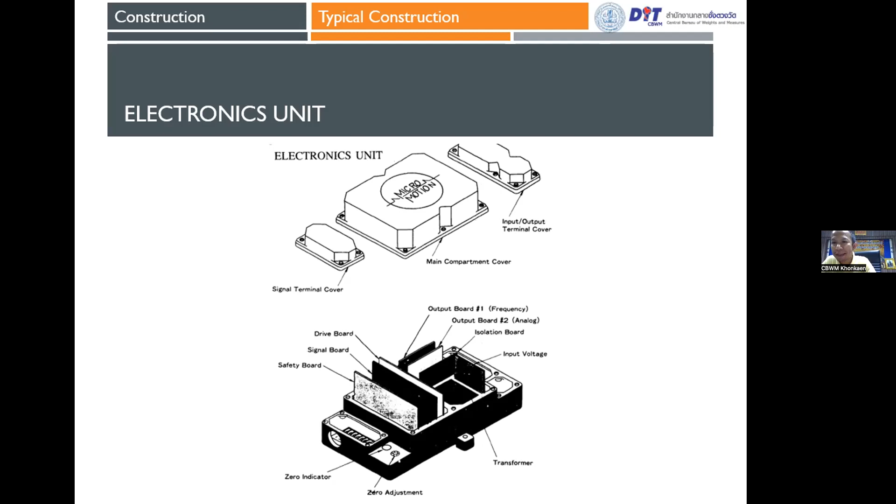Okay, next, electronic unit. Some companies specify the distance between the measuring unit and electronic transmitter shall not be more than 250 meters, or 800 feet. Not more than 250 meters.

This line is the RFT, which consists of a chip and a main board - I don't know the details, but you can learn more. Since the operation of the flow meter inside the sensor unit needs power to create vibration in the measuring tube, there shall be an electric wire and a signal wire connected between the sensor unit and electronic unit. But mostly the electric power wire needs to be separated to the sensor unit.

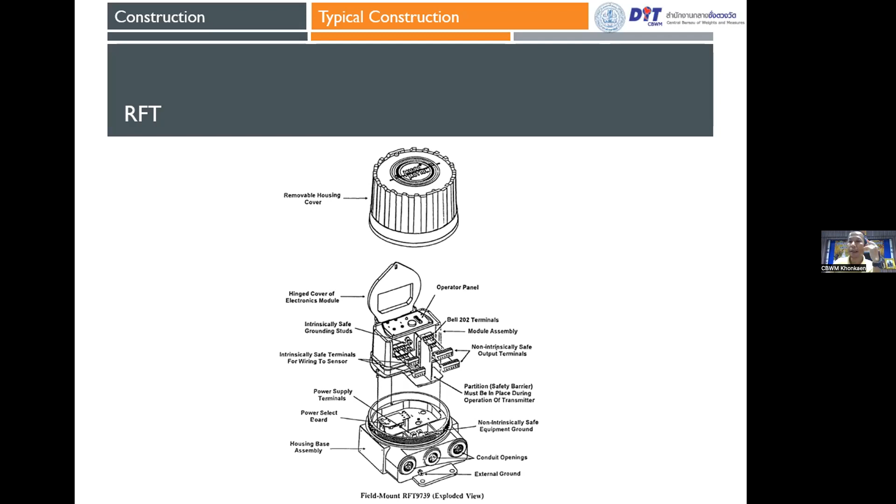Electric unit has an important role in controlling vibration of the measuring tube inside the sensor unit. The measuring tube vibrates at natural frequency in a steady rate across the measuring length. Moreover, the electric unit also receives a signal from the sensor unit and converts it to a standard signal before sending the signal out.

This output signal could be in analog form at a size of 4 to 20 milliamp, or pulse frequency, which could be transmitted to other equipment such as a controller or indicator and a totalizer.

Okay. Okay, I think the last page, the last slide.

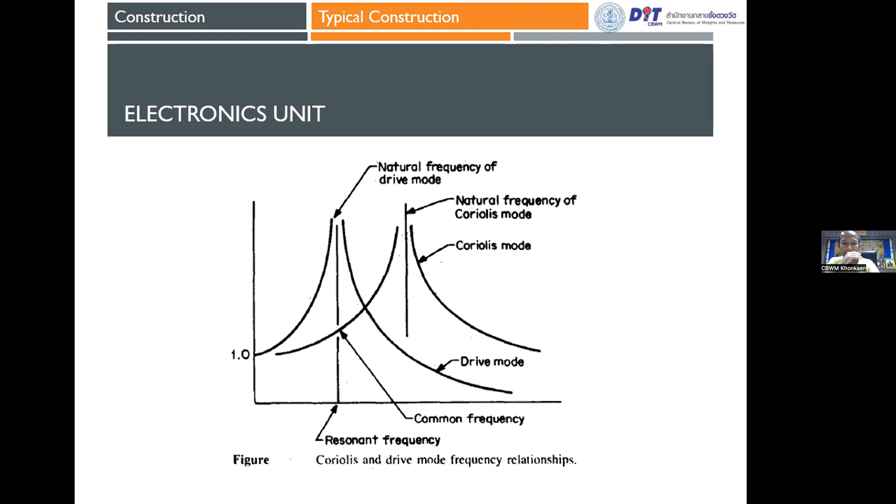Okay, everyone, we will break, coffee break, 30 minutes. Okay, and after that we... Can I just say something? There's no coffee break on the agenda. Marian, okay. Not coffee break. No, sorry. Yeah, okay, otherwise we'll go too long. Okay, sorry, so any participant, you can bring a coffee, yeah, and listen to me.

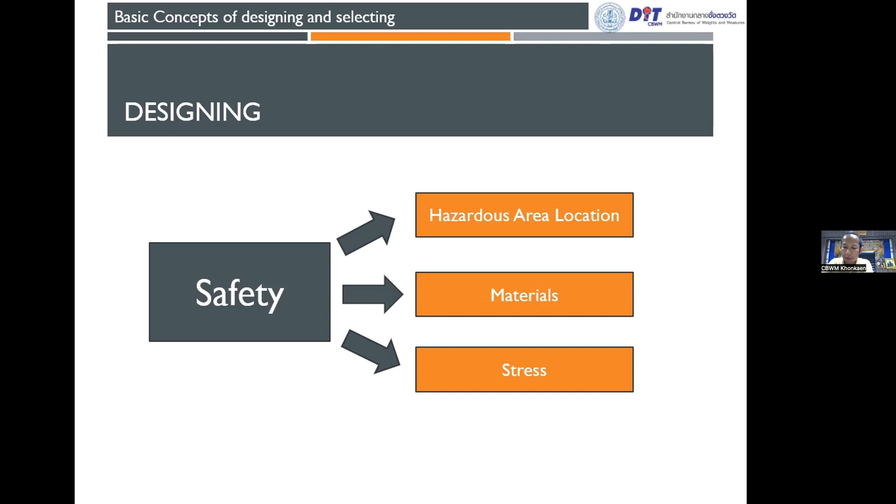Sensor material. Since the principle of operation of a Coriolis flowmeter is vibration of the measuring tube, which is the only movable part, it is needed to be careful of safety because the measuring tube might break or leak. Fatigue stress of the measuring tube is an important factor in designing the tube.

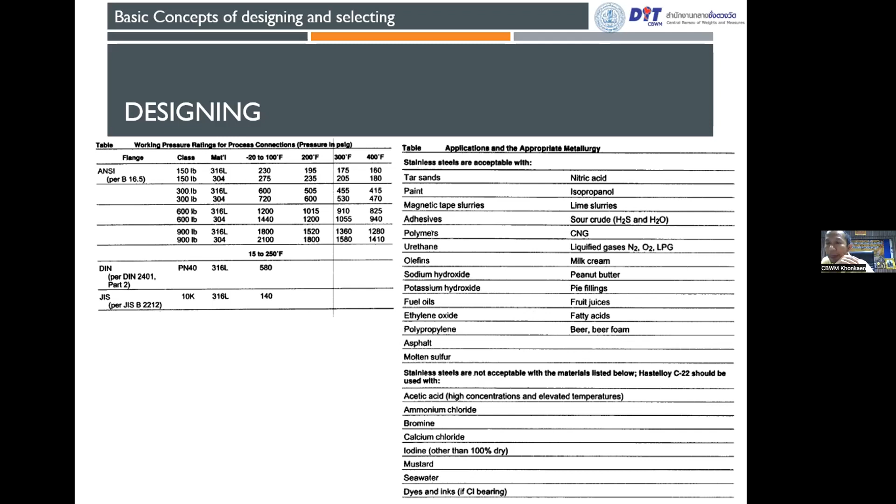Casing of a sensor unit should also be designed to have a sensor to detect... designing electronic circuit to detect the smallest signal is a process you should mostly be concerned with.

Since delta T signal is a variable and an important signal in measuring flow rate of a mass flow meter, which has a value in nanosecond length.

One nanosecond is the time for an electronic signal to move about 30 centimeters or 1 foot in a conductor, which means we should be concerned about the delay in signal transmission through the printed circuit board, conductor, and logic gate, in order to accurately measure the time length of delta T, including protecting the source of electronics which might disturb the signal.

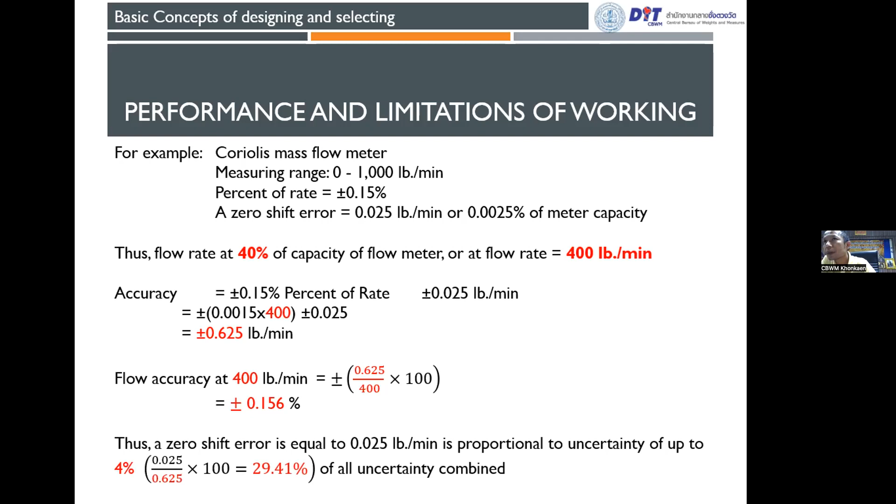Next slide is an example for Coriolis mass flowmeter, that everyone can calculate. Okay, I think for the example Coriolis mass flowmeter, we will skip to the next slide.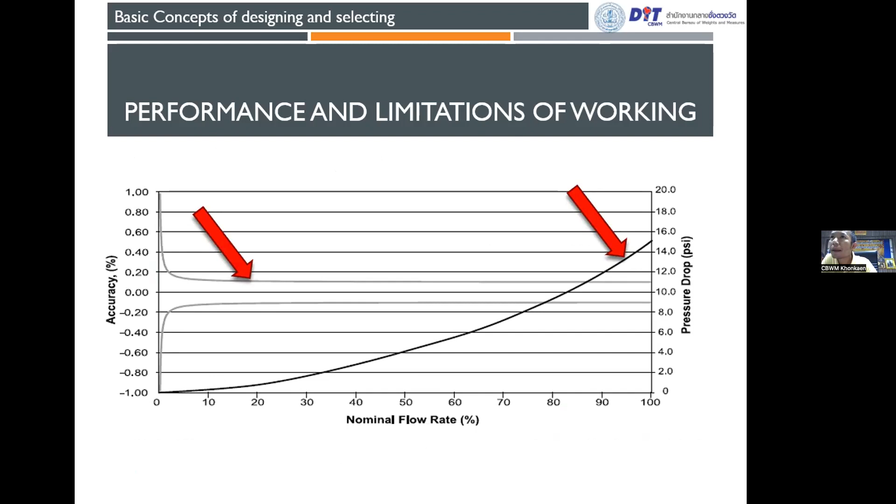The slide shows a comparison of performance of a Coriolis mass flowmeter in order to get the best effectiveness and performance at the lower flow rate as much as possible. Coriolis mass flowmeter has the competence for zero adjustment after being installed into the tube system. Zero adjustment could be done by letting fluid flow through the Coriolis mass flowmeter until the temperature inside the tube is equal to the temperature of the test fluid, then closing the outlet and doing the zero adjustment.

However, a change of temperature will have some impact on zero offset. Most Coriolis mass flowmeter manufacturers will suggest doing zero adjustment when temperature change is less than 10 Celsius from the actual operation temperature.

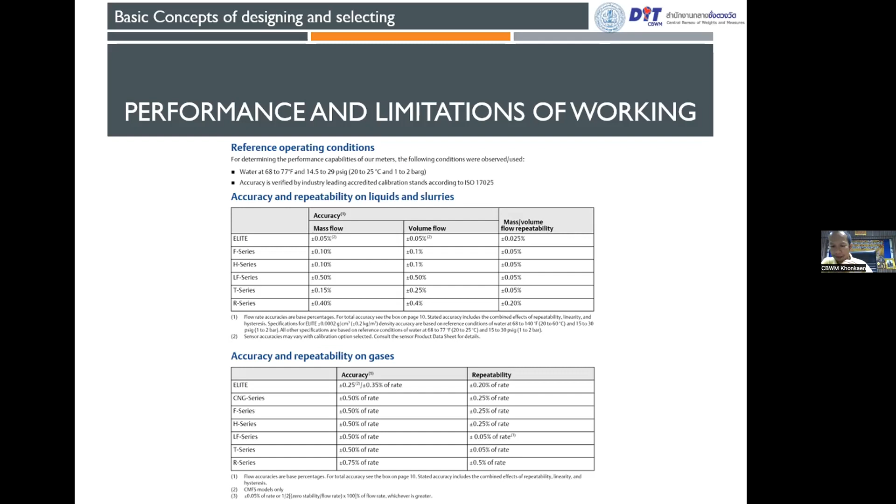Okay, this slide covers accuracy and repeatability.

Bad accuracy, best accuracy, where you have plus or minus 0.50% of rate, and repeatability of plus or minus 0.25% of rate.

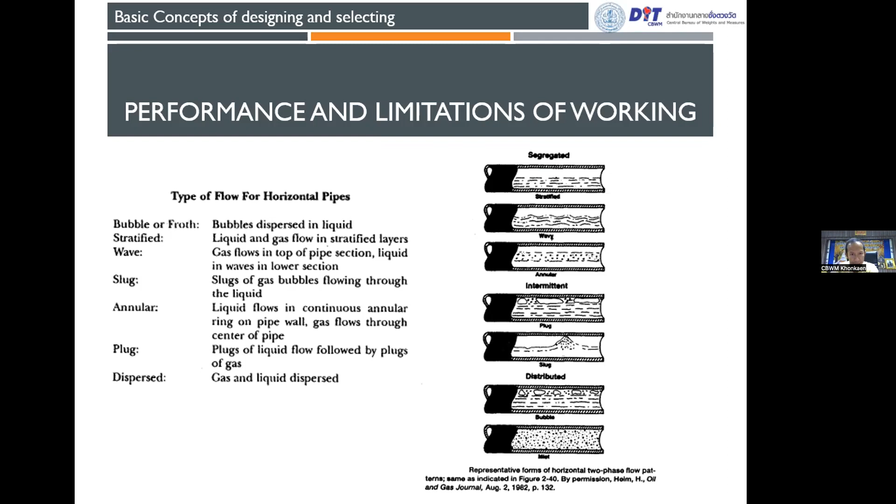Okay, selecting is the final topic for today: selecting our Coriolis mass flow meter.

We consider the flow rate and line size, pressure and temperature rating, wetted parts, and pressure drop.

Flow rate and line size of the measuring system is an important factor in setting the flow meter size by determining, first, that the nominal bore size of the sensor unit should be equal to or smaller than the line size of the piping system used to install the flow meter.

Normally, the pressure drop graph will be given by the manufacturer. That graph is the applied pressure drop determination from the Darcy formula, a formula for the measuring tube which found that the flow rate relates to the laminar flow.

There are laminar flow and turbulent flow. Everyone knows laminar flow is when the flow rate in the tube is smooth, and turbulent flow is when the flow rate is not smooth.

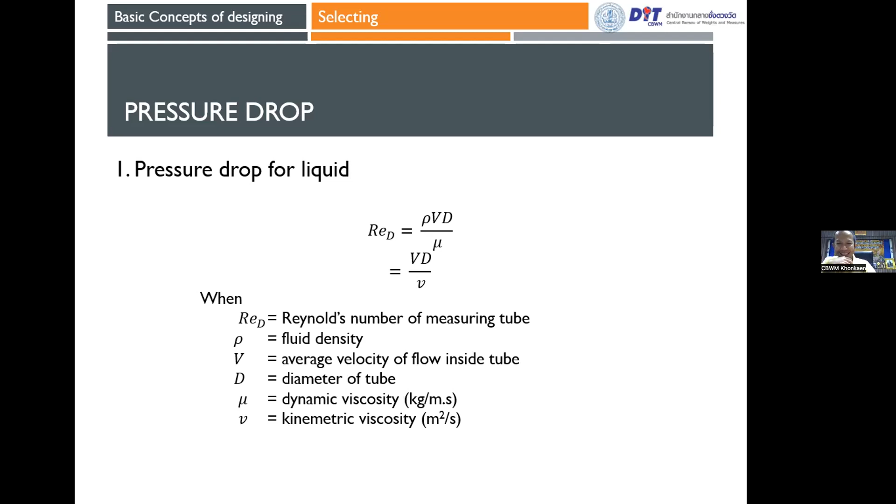In case we need to select a meter for measuring a heavier liquid, we should consult the manufacturer to select a Coriolis flowmeter for measuring mass flow rate. In addition to pressure drop, we should consider full-scale flow rate, available pressure drop, process fluid viscosity at operating condition, and process fluid density.

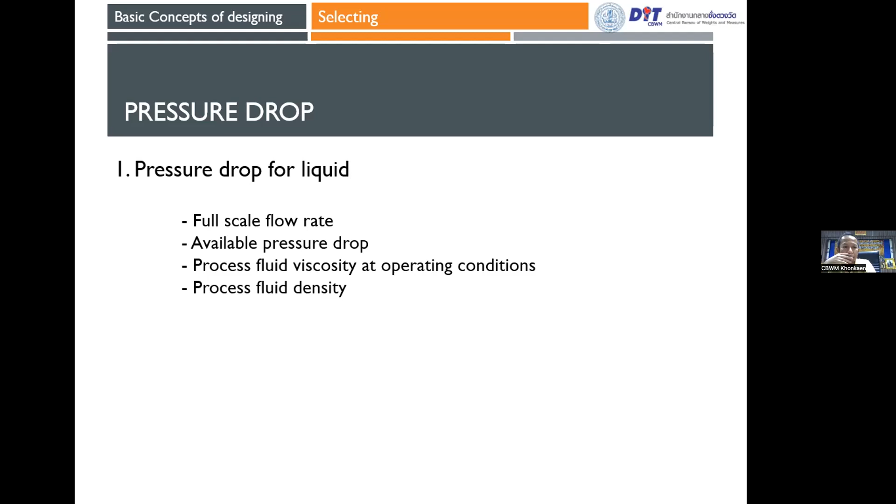This slide covers pressure drop for gas. Pressure drop for gas trends at relatively low density conditions. Thus, to get an accurate mass flow rate result, the pressure inside the tube should be higher than 5 bar or 72.5 psig. This is nearly impossible because in general gas viscosity is less than 0.02 centipoise. Thus, gas flow is nearly always turbulent flow according to the pressure drop graph from the manufacturer, which refers to water flow measurement. We could use the graph to predict pressure drop of a flow meter when used to measure gas.

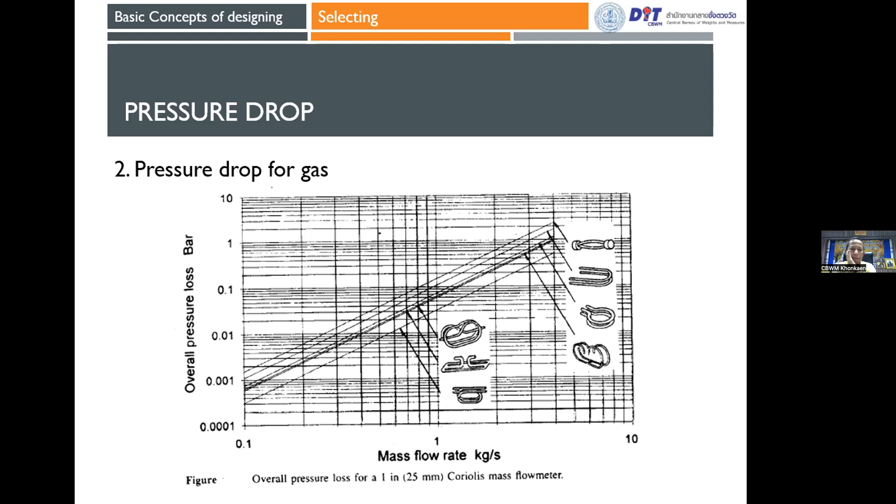In case of selecting a Coriolis mass flow meter to use with a dirty liquid or slurry liquid, we should specify flow with velocity less than 10 feet per second, or 3 meters per second, in order to prevent erosion occurring at the measuring tube or wetted parts while measuring. This is a consideration for dirty liquid.

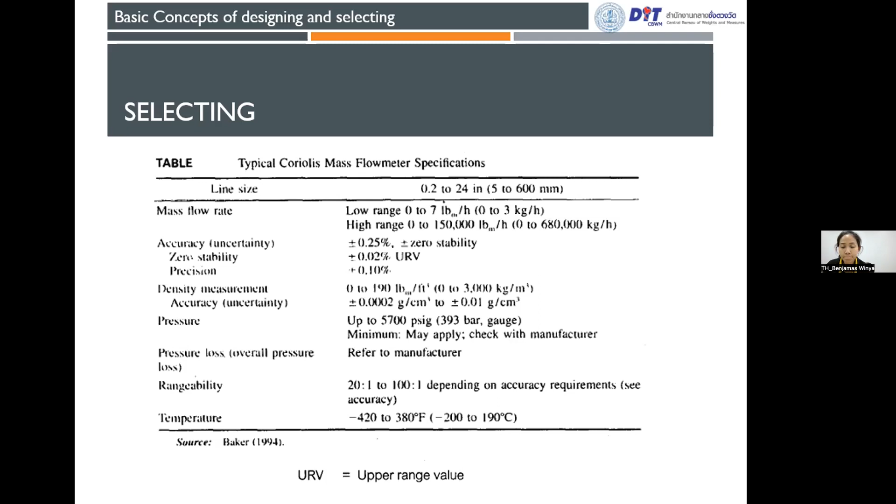Thank you, Philip, for raising it. I did think that when we were listening to them, it was quite odd that Benji had to play them for them to come through. The first time I heard the first one, I thought, it's in English and I can't understand a word they're saying, it was like twice as fast. Neither could I, the audio quality was weird. But thankfully Benji and her team came up with a solution, and we listened to it a second time, which was perfect, because it is a good explanation, don't you think? It's quite simple, it's an easy one to follow.

So I'm not going to put the video links now in the chat box, because Benji, you are going to send them out. Did I get that right? What she's going to do is put them in a Word document, and put the Word document in the box. See at the top of the chat, there's the PTB box, so in that PTB box we'll have everything in one place. Okay, perfect, good.

Anything else, Philip? No, that was the only idea that came up during Kumpanat's presentation. Thank you very much, Kumpanat, for the presentation, for the big job you did. Yes, it is a big job. Thank you, and I think for anybody looking at it or listening to it for the first time, it's quite complex, so they will have to go over the slides again. But fortunately they have them, and they're beautiful slides, very nicely laid out, very clear.